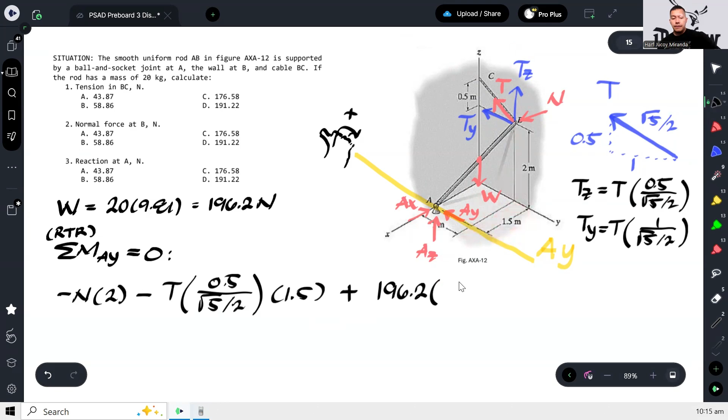No, pag inayos natin yan, ayusin na natin ha. So 2N plus 0.5 times 1.5 over square root of 5/2 times T equals, so i-transpose ko na to, kaya nag-positive na tong dalawa. Equation 1 natin. Okay? So isa pang equation para ma-solve natin itong N tsaka T.

So pwede pa tayong mag-moment ulit, pero sa ibang dimension naman. Kumbaga, sa 2 dimension, di ba pwede ka lang mag-moment isang beses para makabuo ng unique na equation. Sa 3D, pwede ka mag-moment ng 3 beses utilizing the 3 dimensions. So, nagamit na natin tong dimension ng y, gamitin naman natin dimension ng z or ng x. Kung ano yung mas madali. I believe mas madali yung z.

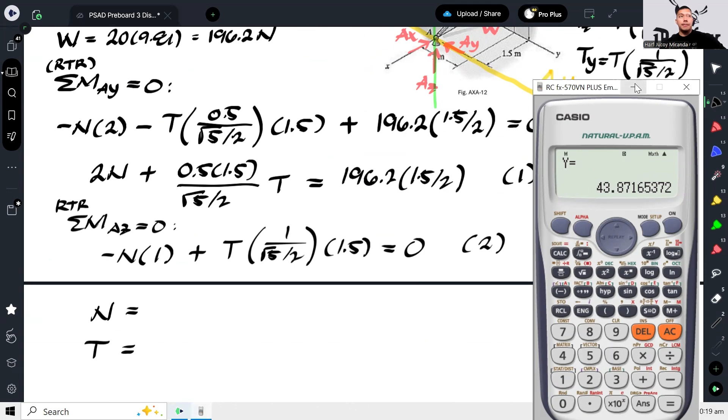Okay, so ang normal force is 58.86. Tapos ang tension ay 43.87. So these are our answers for number 1 and number 2. Okay? And lastly, what is the reaction at A? So yung tinatanong niya dito na reaction is obviously yung resultant. So kailangan natin kunin lahat yung AX, AY, and AZ. So summation of forces lang.

So summation of forces along X equal to 0. So ano ba yung mga forces sa X? Di ba ito, tsaka to. At yun lang, wala nang iba. So ibig sabihin yung AX equal lang sa N.

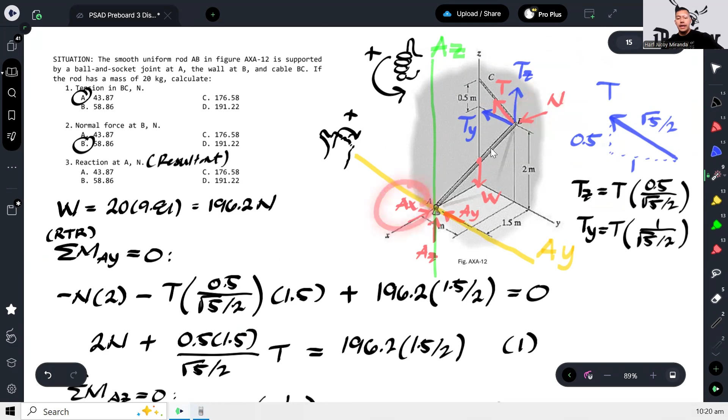Okay, next, summation of forces Y is equal to 0. Ano naman yung mga forces along Y? So we have AY, tapos TY, and wala nang iba. So mali pala yung direction ko, dapat pa ganito. But anyway, doesn't matter. So therefore, AY is equal to negative of TY. Or that is negative of T times 1 over square root of 5 over 2.

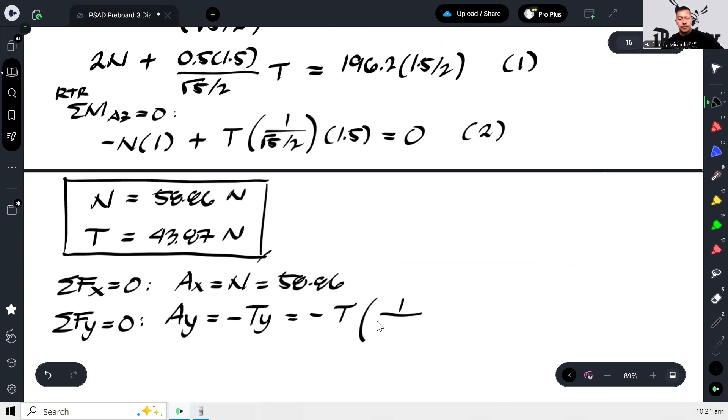So that gives us 39.24. So the negative sign only indicates that we have the incorrect assumption sa direction niya. So it doesn't matter. Hindi naman tinatanong yung direction. So summation of forces along Z. So sa Z naman, yung mga forces na nag-a-act, itong TZ, yung W, tsaka yung AZ. So therefore, AZ is equal to downward yung W, so parang opposite lang siya. Tapos upward yung TZ, so minus sa kabila.

Ang TZ natin ay T times 0.5 over square root of 5 over 2. So 176.58.

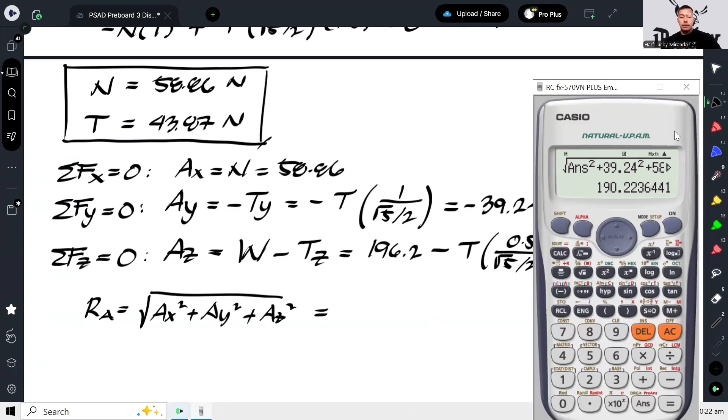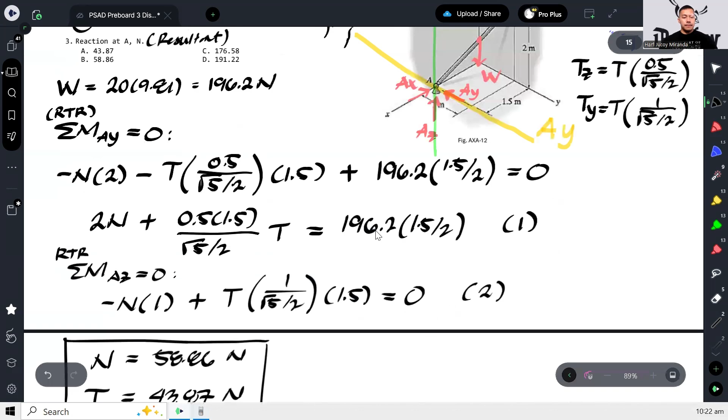Okay, and then therefore, our total reaction at A is equal to square root of AX squared plus AY squared plus AZ squared. Okay, that gives us 190.22. So from the choices, I believe this is just a typo error. Should be 190.22. Okay, and that's how we answer this problem.